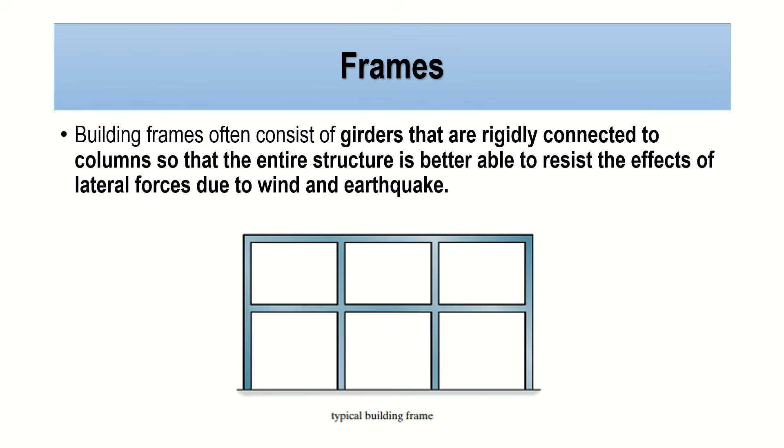Ngayon, bakit nga ba natin kailangan mag-approximate? Sabi dito, exact analysis of indeterminate structure involves computation of deflection and solution of simultaneous equations, so it can be quite time-consuming. Moreover, such an analysis depends on the relative sizes, cross-sectional areas, and or moment of inertia of the members of the structure. Ibig sabihin, kailangan nating i-compute yung deflection or displacement ng structure, as well as solving simultaneous equations. Bakit nga ba natin kailangan mag-solve ng simultaneous equation?

Kasi po, class, if we are solving a framing system, the structure is probably an indeterminate structure. Kapag indeterminate yan, kailangan mo ng maraming unknowns or kailangan mo ng maraming equations para sa maraming unknowns. Kaya para ma-solve yan, kailangan mo mag-solve ng simultaneous equation, and that can be time-consuming. Plus, of course, initially, if you're designing a structure, wala ka pang idea kung ano yung cross-sectional area na papasa, as well as the moment of inertia. Kaya every change mo ng cross-sectional area, every change mo ng moment of inertia, nagbabago din yung ating deflection, nagbabago din yung ating self-weight. Therefore, it can be time-consuming, especially if you're iterating sizes pa.

Ngayon, ginagawa natin tong approximate for that reason. Because of this difficulty associated with the exact analysis, the preliminary design of indeterminate structures is often based on results of approximate analysis, in which the internal forces are estimated by making certain assumptions about the deformation or the distribution of forces between the members of the structure, thereby avoiding the necessity of computing deflection. Ibig sabihin, in order to do approximate analysis, we will be making certain assumptions based on deformation as well as stress distribution or force distribution among each of the members of the structure. Yun daw yung gagawin natin—yung typical behavior ng structure, gagamitin natin yon para makapag-approximate.

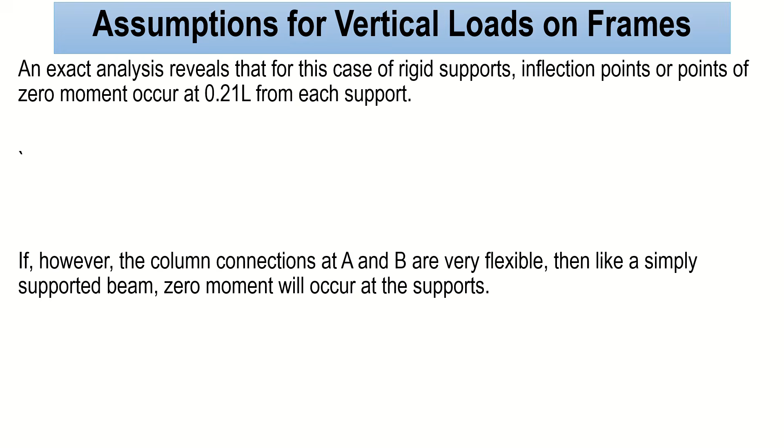Okay, so let's start siguro sa vertical loads and frames. Again, like I said, we need to make certain assumptions. Sabi dito, an exact analysis reveals that for this case of rigid support, inflection points or points of zero moment occur at 0.21 length from each support. Ibig sabihin, if we have a girder supported by rigid members or rigidly connected to members—for example, merong girder tapos connected rigidly sa column—ibig sabihin kaya niyang mag-resist ng moment, or fixed support. Kapag ganyan daw yung scenario, yung point of zero moment or point of inflection, kung saan nagpapalit ng sign yung moment diagram natin from negative to positive or positive to negative, mangyayari yan at 0.21 or 21% ng length from the left support and right support.

Okay, ngayon, if however the column connections at A and B are very flexible, ibig sabihin para siyang simply supported, yung zero moment natin will occur at the support.

So alam natin yan, no? Kapag nag-solve tayo ng shear and moment diagram, kapag sa simply supported beam, tapos loaded all throughout siya with a uniform load, ang zero moment natin will always happen at the support or point of inflection.

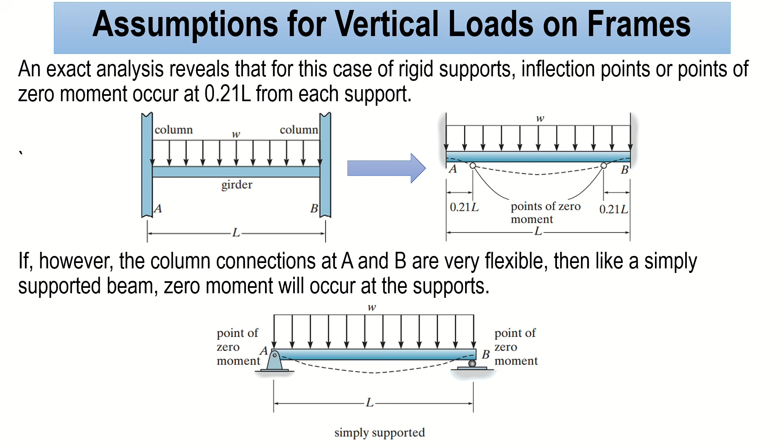So ngayon, we can create relationship between that. Paano tayo makapag-create ng relationship? So the moment diagram of a simply supported beam loaded all throughout is like this. Nakita niyo yung appearance?

Siyempre, ang maximum moment natin is WL squared over 8. Ngayon, class, if we have a rigidly connected girder to the support, the moment diagram, like I said, is around 21% ng length, or yung point of inflection is around 21% of the length from the left support tsaka right support. And this is the appearance of your moment diagram.

So, anong certain assumption ang gagamitin natin dyan? Since these are inflection points, ito, inflection points yan, tapos ito, pin and roller. So, we can say that we can change this one, itong point na to. Tapos sabihin natin, pwede nating lagyan ng pin and roller yan. Kasi point of inflection naman yan tama ba? So, ngayon, pwede ako palang maglagay ng pin tsaka roller dito. Yun yung certain assumption na gagamitin natin para makapag-solve tayo ng indeterminate frame.

So ngayon, kapag nilagyan ko ba ng pin tsaka roller yan, magiging determinate na yan? Of course. Kasi, kapag meron tayong fix, meron tayong 3 unknowns. Di ba meron tayong pin? So, another 2, 5 na. Ngayon, meron kang roller, 6. Ngayon, meron ka ulit fix, 3. So, ilan na yun? 9.

And ang nangyari, naputol sa 3 segments ang ating girder. So, isang segment, pangalawa, pangatlo. Kasi nilagyan mo ng simply supported sa gitna, so anong mangyayari? We got 3n. So, 3n is 3 times 3, which is 9. And we have 9 unknown. So, therefore, this structure or this framing system will become statically determinate.

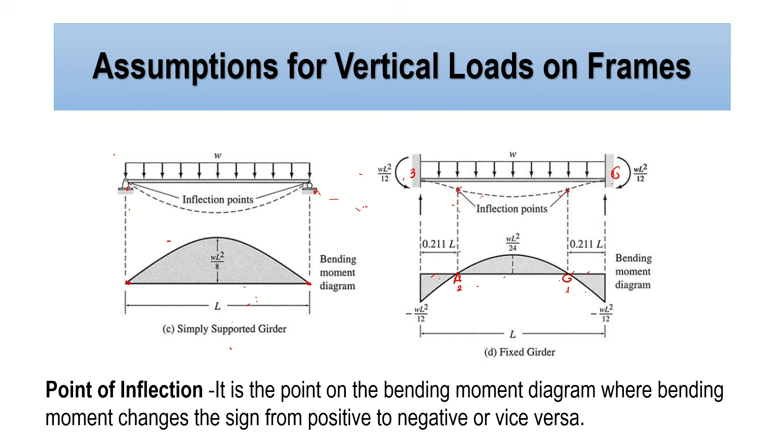Okay? So, ngayon, ayan, it is the point on the bending moment diagram where the bending moment changes the sign from positive to negative or vice versa. And then sabi dito, in reality, however, the column will provide some form of flexibility at the support, and therefore, we will assume that zero moments occur at the average point between the two extremes.

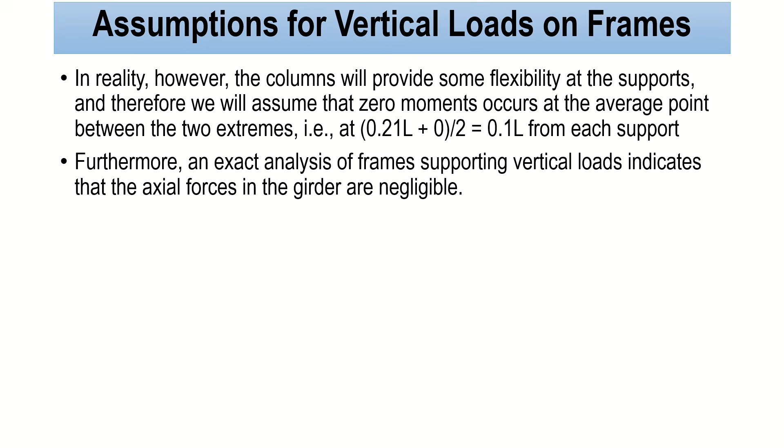So, therefore, yung 0.21, di-divide natin ng 2 from each support. Furthermore, an exact analysis of frames supporting vertical loads indicate that axial forces in the girder are negligible. Ibig sabihin, instead of using 21% ng length from the left support and right support, ang gagamitin natin is 10% ng left tsaka right. Doon tayo maglalagay ng pin tsaka roller.

Bakit ganon? Kasi nga, hindi naman totally fixed yung ating column. It will provide some form of flexibility. So, kaya, dinidivide natin sa 2. So, meron tayo ditong 10% length, 10% length, pin, roller. Of course, binawasan mo ng 20% yung length, yung natira sa gitna is 80%.

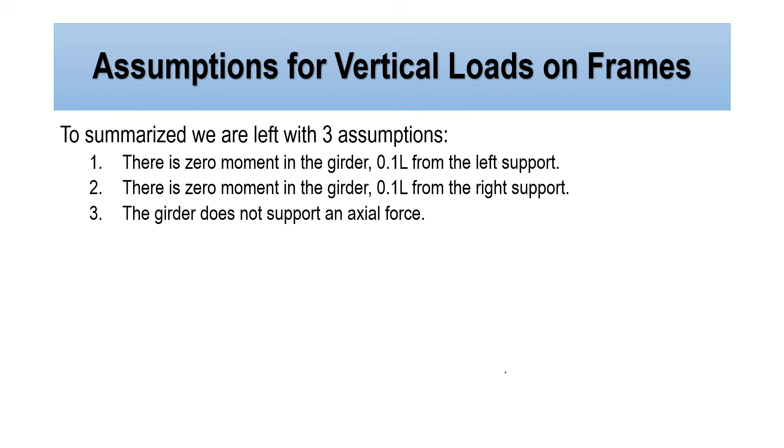Okay? So, ngayon, in summarize, ito yung ating 3 assumptions. Sabi natin, there is zero moment in the girder, 10% of the length from the left support, and also there is zero moment in the girder, 10% of the length from the right support. And then number 3, the girder does not support any axial forces. Okay? So, ngayon, ito yung summarize.

For example, we have a framing system, tapos we will solve it approximately due to vertical loads. So, ngayon, again, 10%, lagay kang pin and roller. Kapag tuloy-tuloy, ganun lang din gawin mo sa kabilang girder. Again, determinate pa rin yan kasi pinapalitan mo pa rin ng simply supported yung gitna. Okay? You don't need to worry. So, ganun lang din, ayan, no? Pinalitan lang natin ng pin tsaka roller.

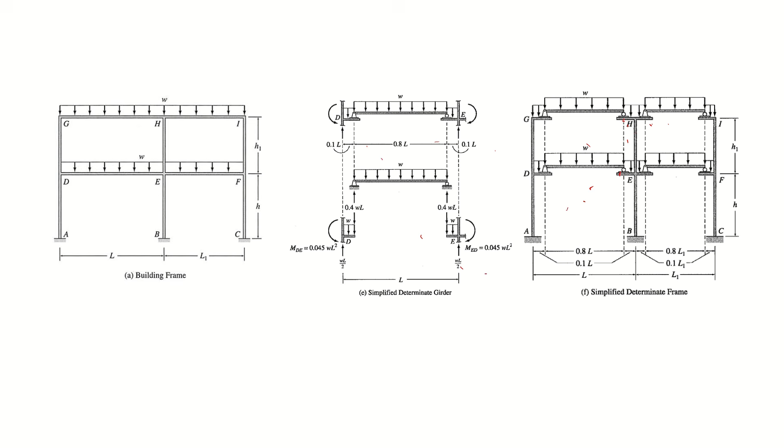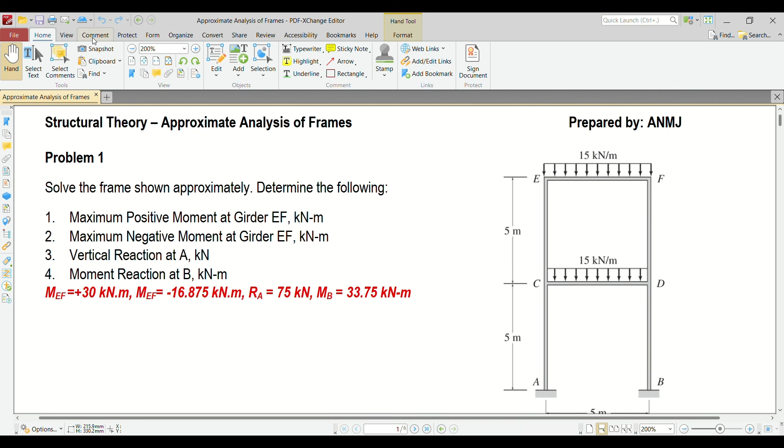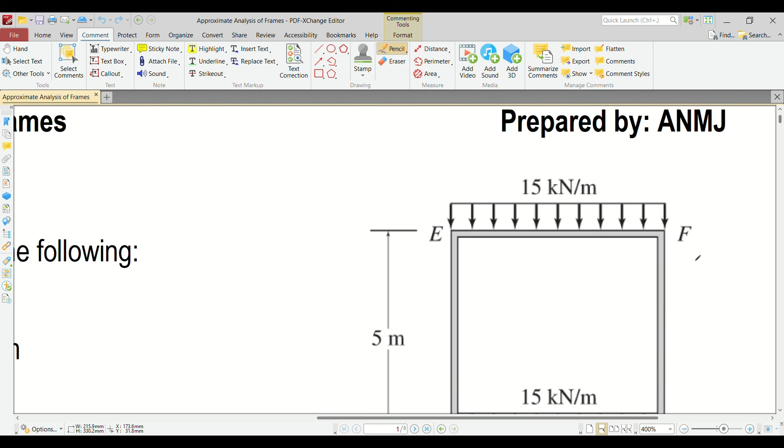Let's start with the maximum positive moment at girder EF. As you can see, the moment diagram of a rigidly connected member looks like this - did you see this earlier? Now, where does the maximum positive moment happen? At the center, right?

So what we'll do is measure 10% of the length from the left and from the right, then solve for the moment at the center. Let's try that - this is for number 1. You can skip this part if you're in a hurry.

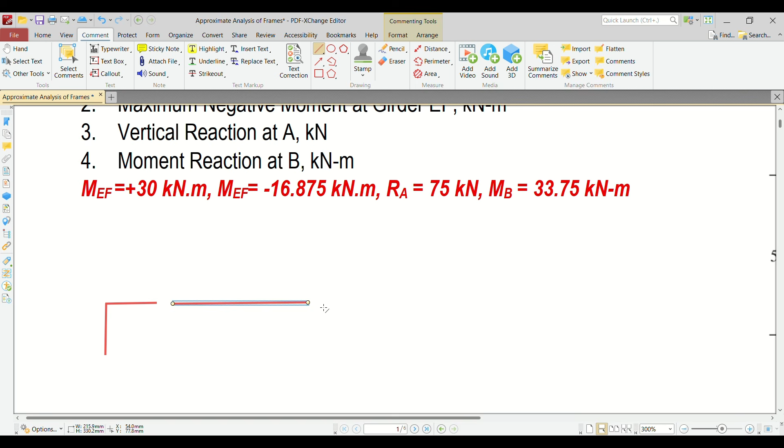So here is our framing system. This is E, let's fix this, and this one is F. And don't forget the loading - of course we have loading.

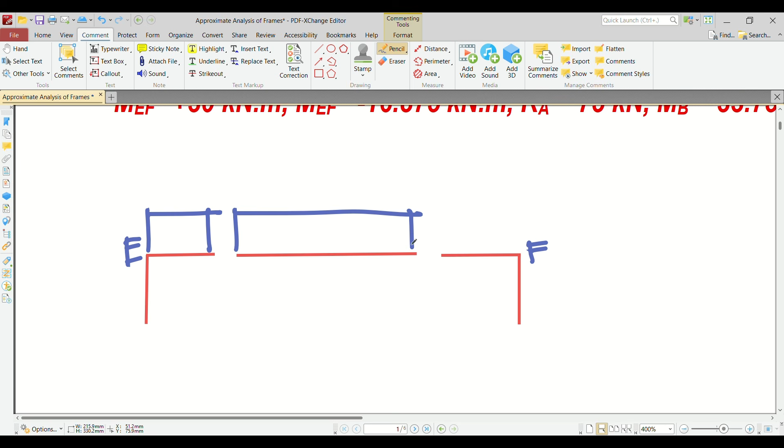The length of this one is 10%, so if that's 10%, this is 80%, then this is also 10% of the length. So what is the length? The length is 5 meters. What is 10% of 5 meters? 5 times 0.1, that is 0.5. So this is 0.5.

This is also 0.5. So 5 minus two 0.5's, that is 1, so the middle portion is probably 4 meters. Let's add the loading: this is 15 kilonewton per meter, this is also 15 kilonewton per meter, and this one is also 15 kilonewton per meter.

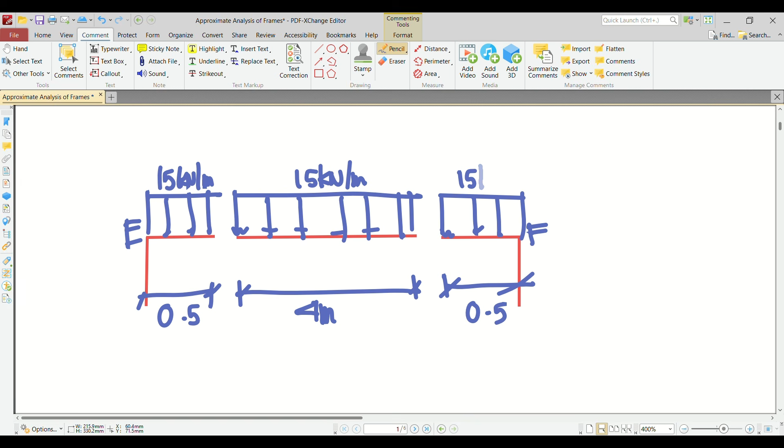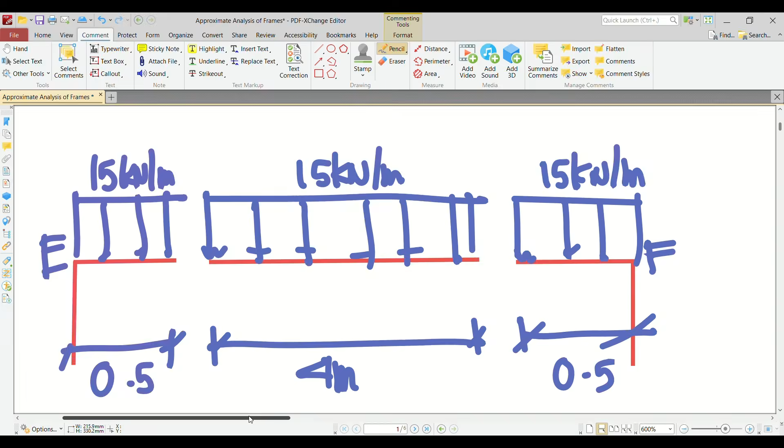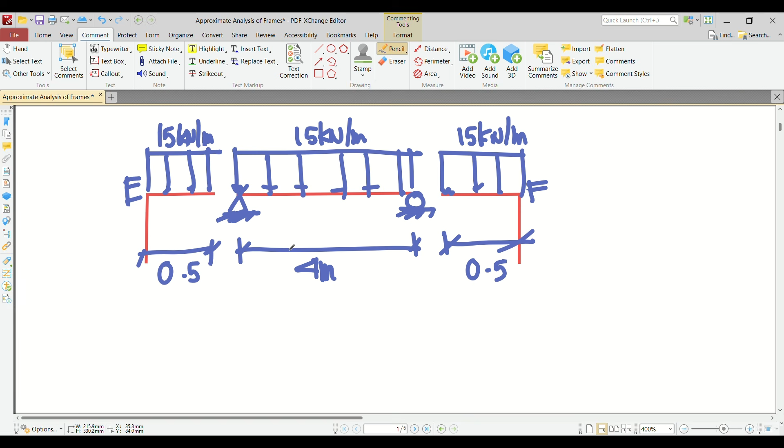We're asked to find the value for the maximum positive moment. Again, the maximum positive moment happens at the midspan of the framing system, here in the middle. This means we need to replace it with a simply supported beam - so this becomes a pin, this becomes a roller.

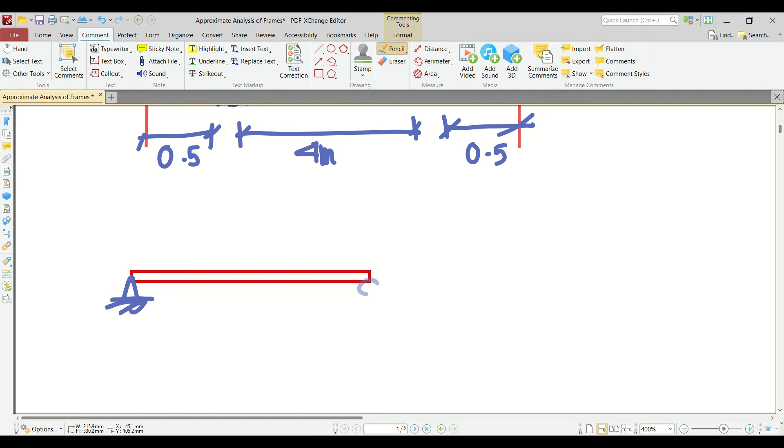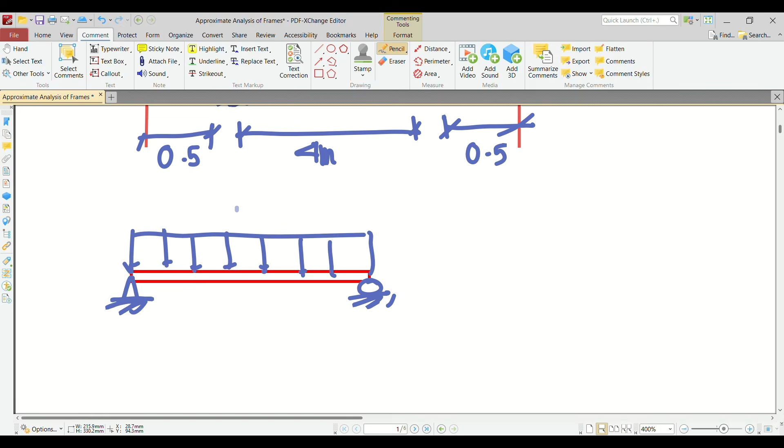So we have a simply supported beam with a length of 4 meters and a uniform load of 15 kilonewton per meter. Let me redraw this for clarity - so here it is. We have a pin, a roller, 15 kilonewton per meter, and this is 4 meters. This is just coming from the previous setup, I just rearranged it.

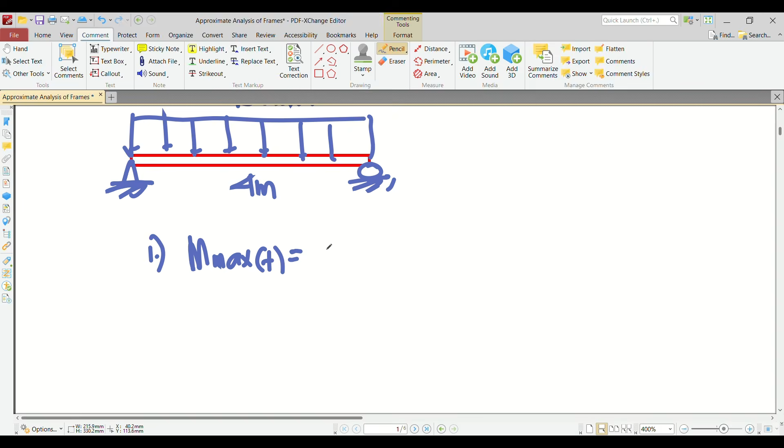When we have simply supported beams loaded all throughout, you saw the formula earlier. So for number 1, the formula for maximum positive moment is equal to WL squared over 8. Our W is 15, and our L is 4 squared over 8.

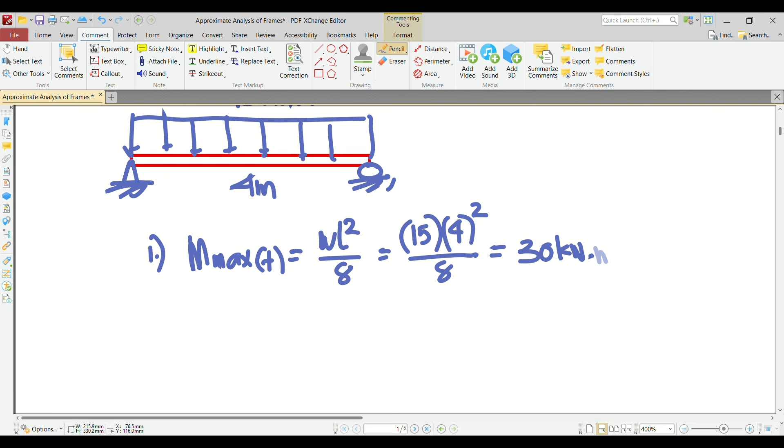So what's the answer here? 15, 4 squared over 8, that is 30 kilonewton meter. That is your answer for problem number 1. That's correct - 30 kilonewton meter.

Next, we need to find the maximum negative moment at girder EF. Like I said, the moment diagram looks like this. Now where does the negative moment occur? Probably at the left segment or the right segment.

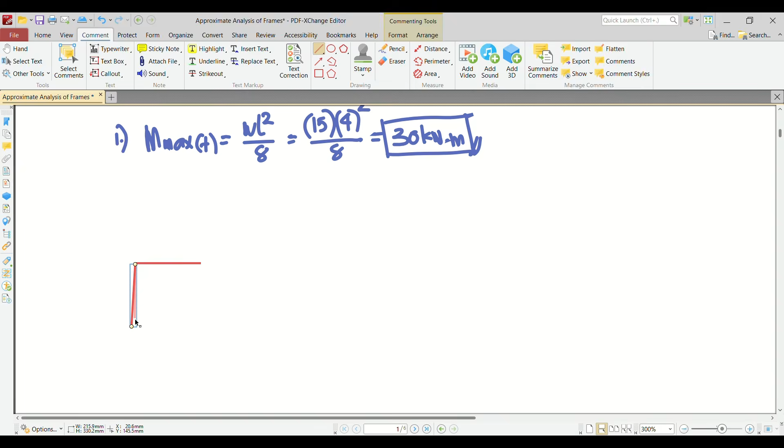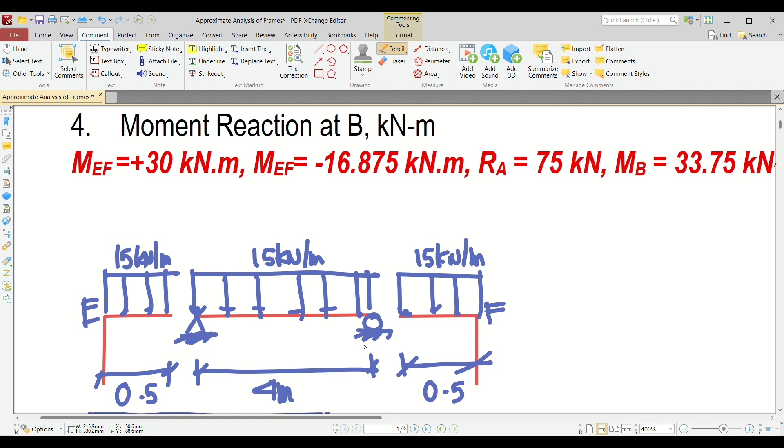I'm just isolating this part. So this one is 15 kilonewton per meter, this is point E, and we're looking for the negative moment. Don't forget, this is an internal pin and internal roller. Now there's a reaction there, right?

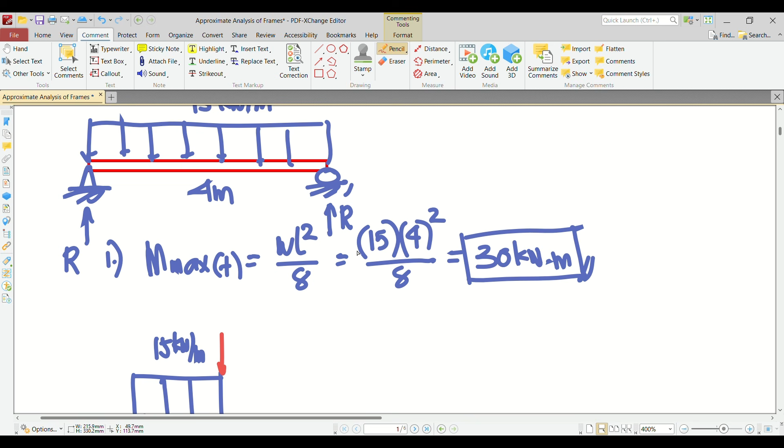We all know the formula for getting the reaction for a simply supported beam is just WL over 2. So now let's get R, which is equal to WL over 2.

So that is 15 times 4 divided by 2. 15 times 4 is 60. Tama ba? 60 divided by 2, so that is 30.

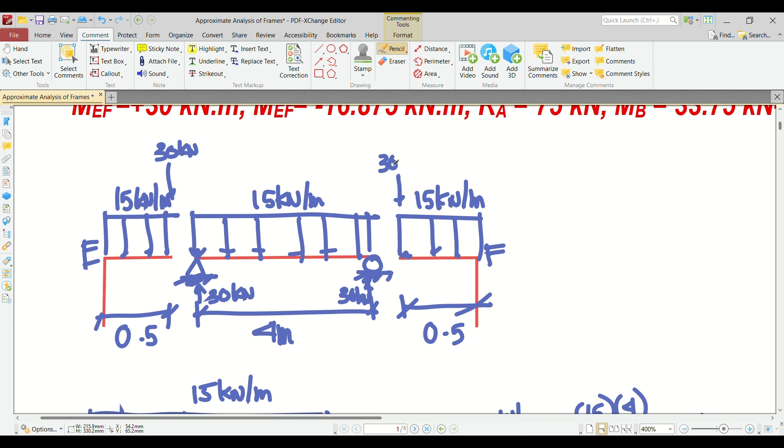30 kilonewton. Ibig sabihin, may 30 kilonewtons ka pala dito. Itatransfer mo rin yan sa kabila. So meron ka ditong 30 kilonewton, and then we have here also 30 kilonewton. Ganyan talaga kapag may internal pin tsaka internal roller.

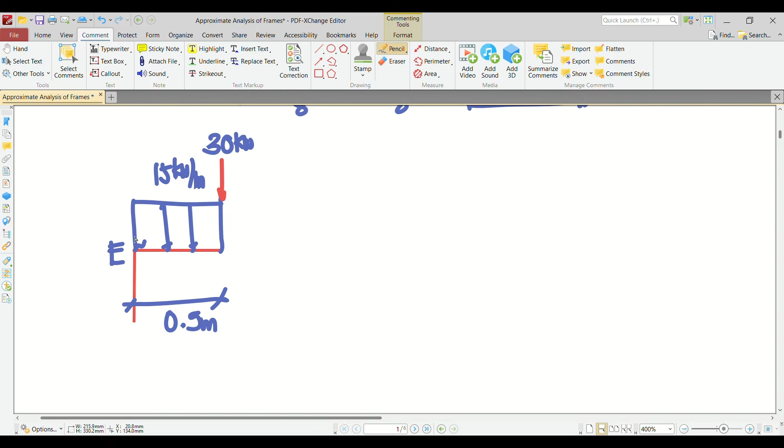Ito ay 30 kilonewton. Remember that this distance is around 0.5 meters. So madali lang yan, para makuha yung moment dyan, di mag-moment ka lang dito. Summation moment, tawagin natin tong ME.

By the way, this is number 2. Clockwise positive. So therefore, negative ME plus 15 times 0.5 times 0.5 divided by 2, and then plus 30 times 0.5, equal to 0.

So ngayon, don't worry. Ang lalabas dyan, of course, is positive. But our moment is counterclockwise, which is negative talaga. Negative x plus 15, positive yan lumabas sagot natin. Pero of course, alam naman natin na negative talaga yung sagot based on the moment diagram. Tinama ko lang yung sign convention.

So the answer here is 16.875 kilonewton meter. Wag malilito, positive yung lalabas dyan, pero counterclockwise nga ito, so dapat negative pa rin. Tinama ko lang yung ating assumption. Let's see if we're correct. Tama naman, negative.

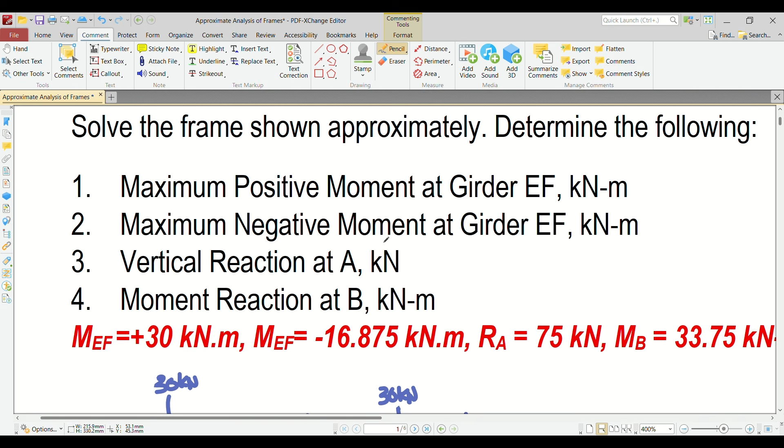16.875. So ngayon, yung number 3, determine the vertical reaction at point A. So ito yung point A natin. Paano natin ma-determine yung vertical reaction? Hatiin mo dito and then get the vertical reaction.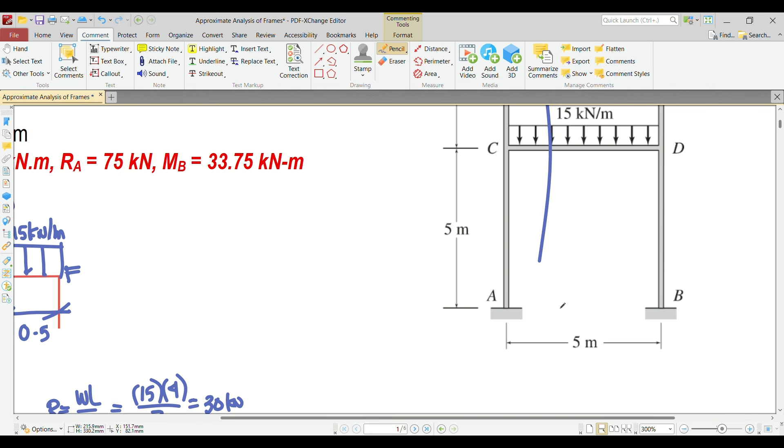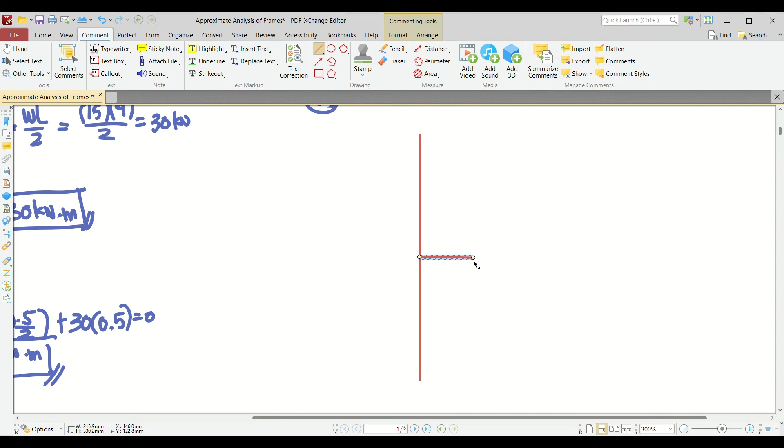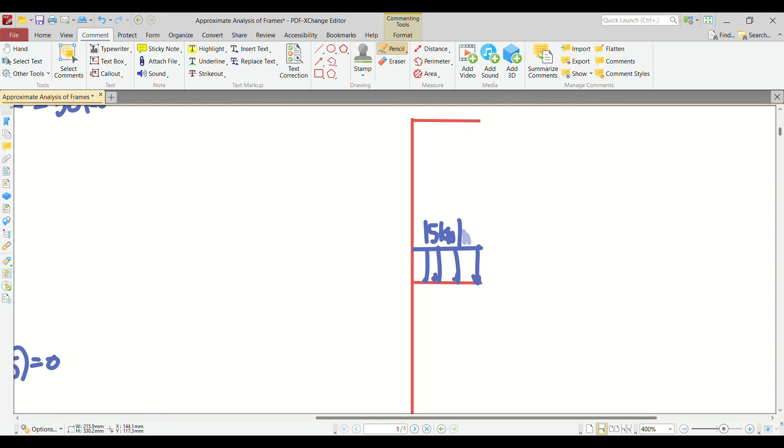Okay, paano yun? So this is number 2, and number 3, sorry. Sa number 3, kapag hinati ko yan, may ganito. Tapos lagyan natin ng loading. This is 15 kilonewton per meter. This is also 15 kilonewton per meter.

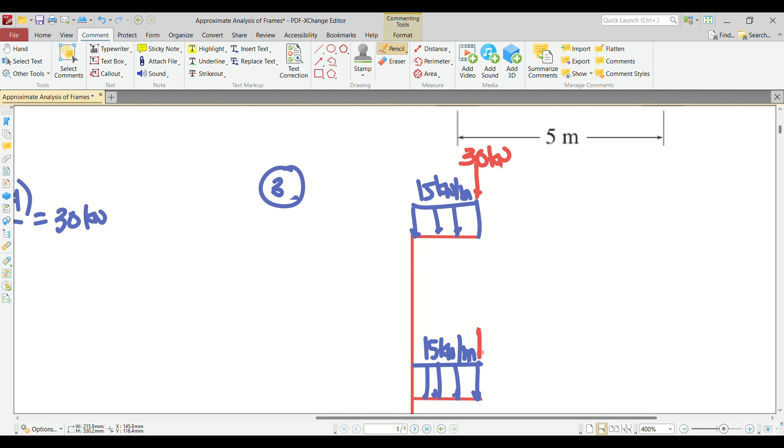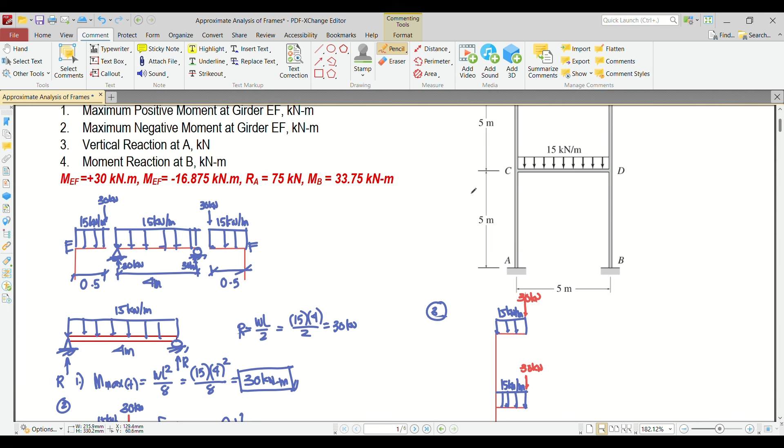Ay sorry, hindi ko pa nalagyan ng uniform load. And then, of course, we do have 30 kilonewton. Syempre parehas lang yan sa baba, 30 kilonewton, parehas lang naman kasi ng distance. Ito rin, magiging ganito rin yan, and then ita-transfer mo din yung concentrated reaction sa left side tsaka sa right side. So this is point E, tsaka C, tsaka A.

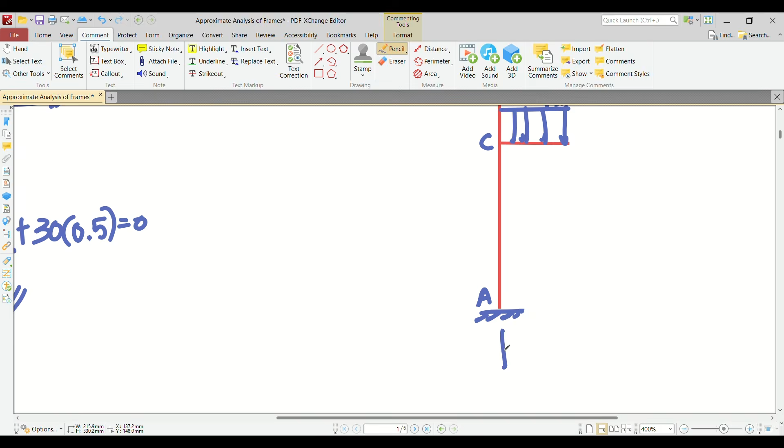So this is point E, C, and then A. Ang hinahanap is vertical reaction sa A or AY. So ngayon, paano mo susolvein yung AY? E di summation forces vertical lang, no? Summation forces vertical equals 0, upward positive.

So therefore, what will happen? So we have, remember, this distance is 0.5. Ano mangyayari? So we have AY, positive kasi upward, so minus 15 times 0.5. Ngayon, multiply mo yan sa dalawa kasi dalawa up and down, so times 2, minus 30 kasi downward times 2 ulit kasi dalawa, equals 0.

So yung AY natin should be equivalent to 15, 0.5 times 2, plus 30 times 2. So 75 kilonewton. Yung reaction mo sa point A is 75 kilonewton. Let's see if we're correct. O, tama naman, RA is 75 kilonewton.

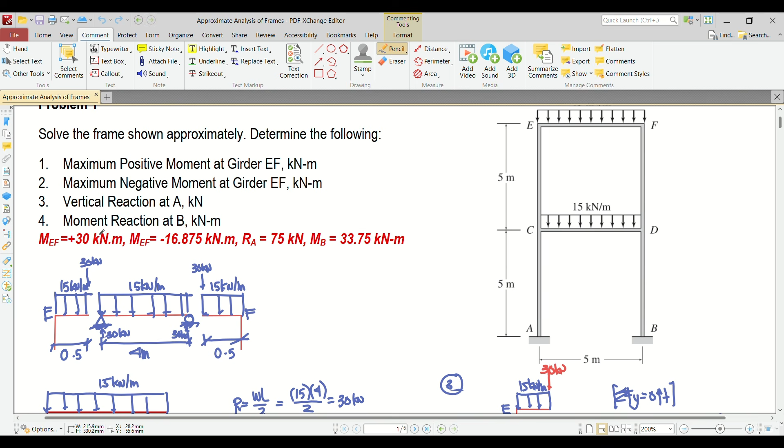So ngayon, pinapahanap ka rin ng moment reaction sa B. So ngayon, i-drawing naman natin yung left side. Ay, yung right side, sorry. Ito yung number 4.

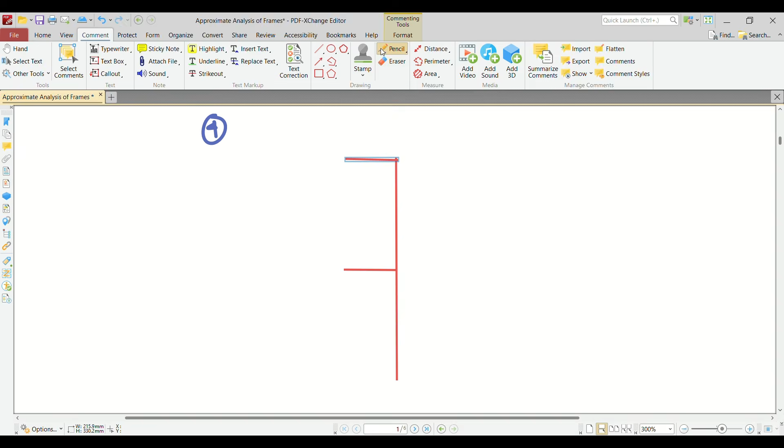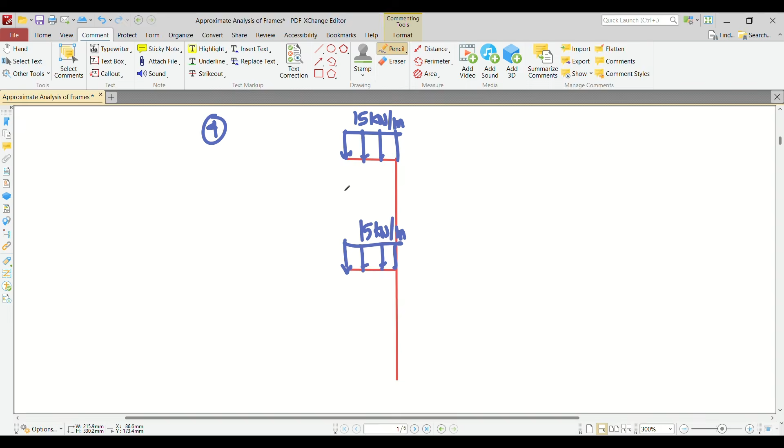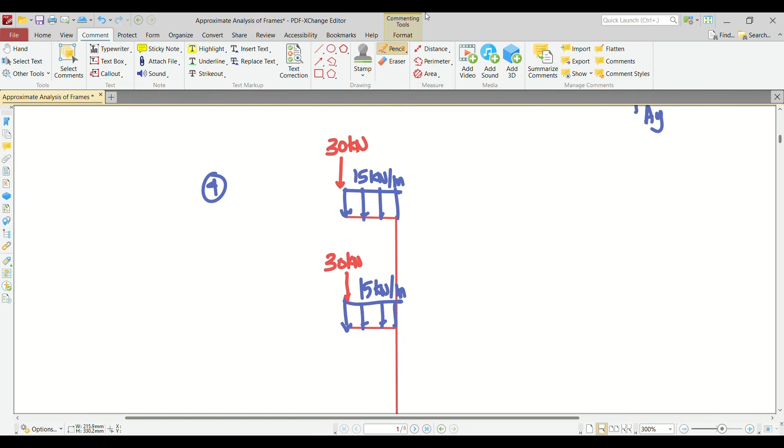Okay, lagyan natin ng loading. 15. So ngayon, lagyan natin ng concentrated loading. Again, meron din doon 30 ha, kasi may roller din dyan. 30 kilonewton. 30 kilonewton.

Okay, and then of course, lagyan natin ng support. And then, ang pinapahanap is MB. So assuming natin this is MB. May vertical din dyan, pero hindi na natin sasolve kasi pinapahanap lang naman si MB. Again, this distance is 0.5 also.

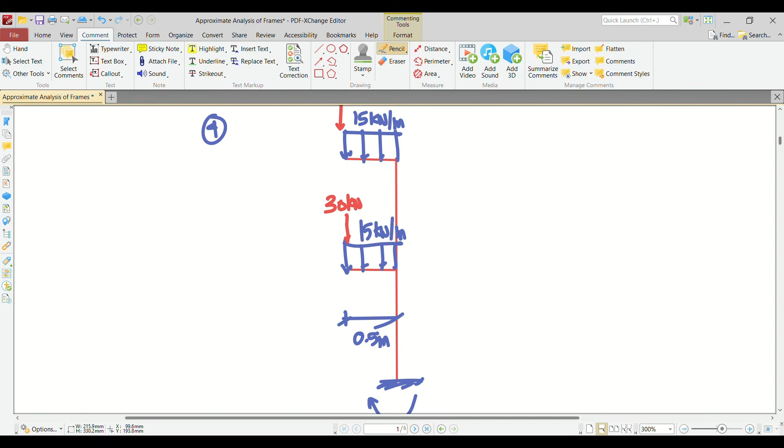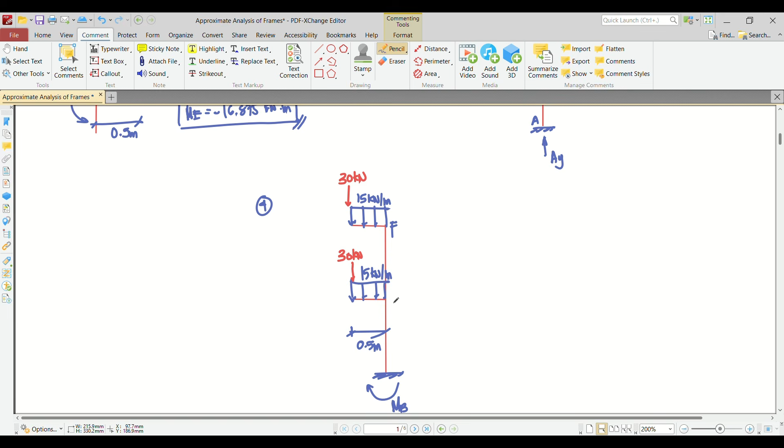Ngayon, paano natin ito sasolve? E di mag-moment ka sa point B. Ito ay F. Ano yan? D ba ito? D. B. Okay, so let's try.

Summation moment sa B equals 0, clockwise positive. So what will happen? So we have positive MB. And then, minus 15 times 0.5 times 0.5 over 2 times 2 kasi dalawa.

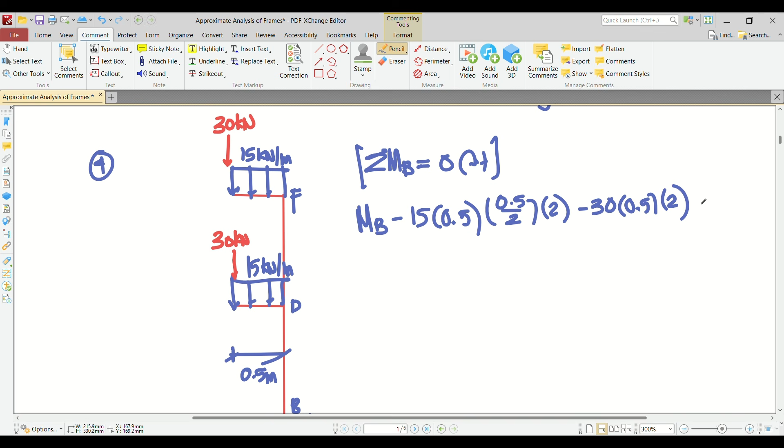And then, minus 30 times 0.5 times 2. Perpendicular distance ang sinusukat natin, no? So perpendicular distance nito is of course 0.5. And then, equal mo yan sa 0. So MB is equivalent to 33.75.

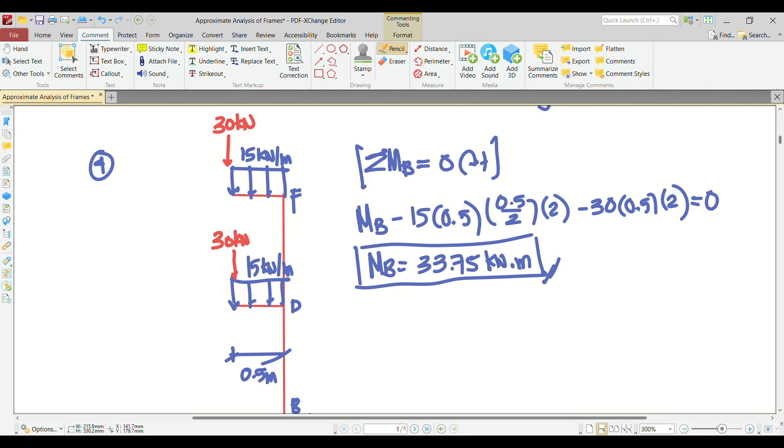Kilonewton meter. Okay? So that's how we solve problem number 4. Let's see if we're correct. Correct naman. Okay? That's how we solve problem number 4.

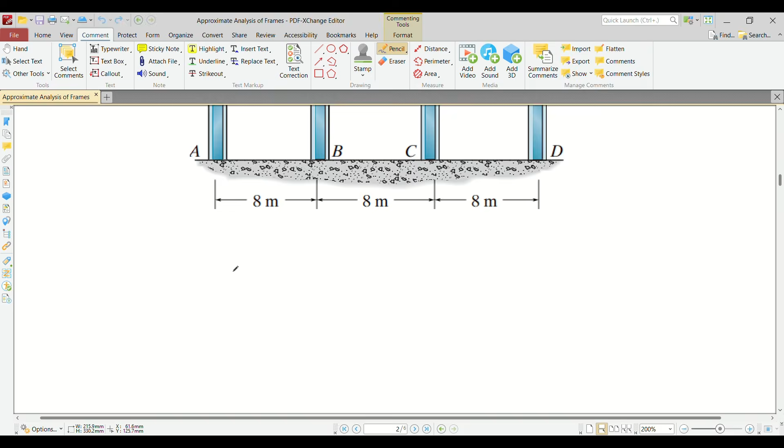Ngayon, let's try to solve first the point A. Sa point A, anong gagawin natin dyan? Again, hatiin natin. So, 10% lagyan mo ng pin, 10% lagyan mo ng roller. Pero, para mas malinaw, i-isolate ko na lang. So, bali mangyayari ganito.

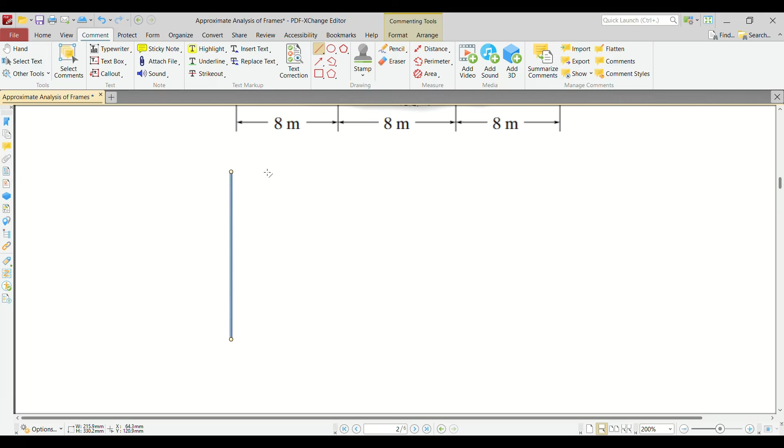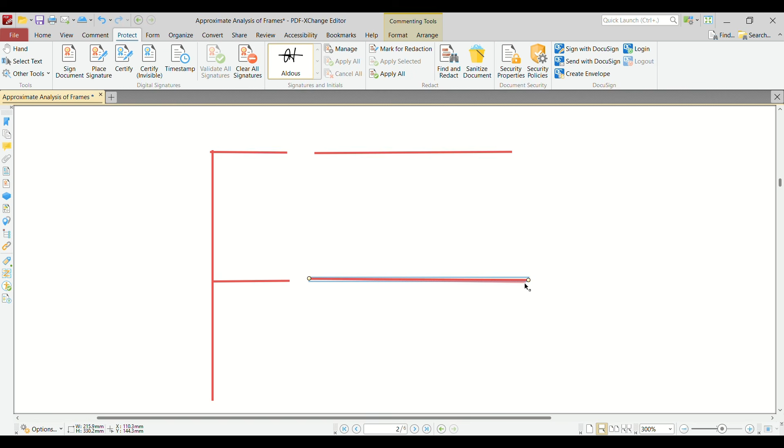Okay? So, again, dahil meron tayong pin tsaka roller dito, so yung reaction niyan is madadamay natin. I-drawing ko na lang din yung kalahati para mas maayos. So, we have here, pag ganito, pagpasensyahan nyo na yung drawing ko.

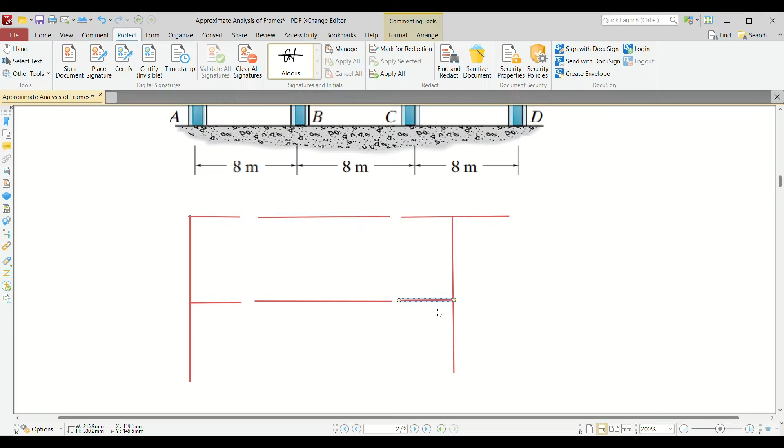And then, let's write the pin. Tsaka column. Ay, pin tsaka column. Pin tsaka roller. So, you have your pin and a roller. Tapos dito ulit, pin. Dito ulit, roller. Okay? And let's write the loadings.

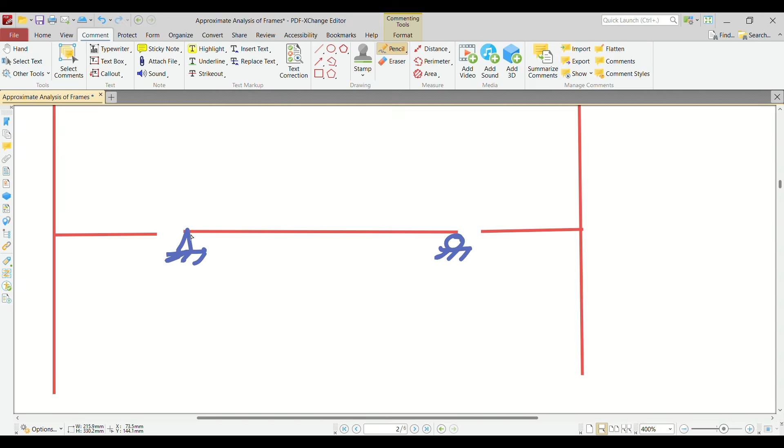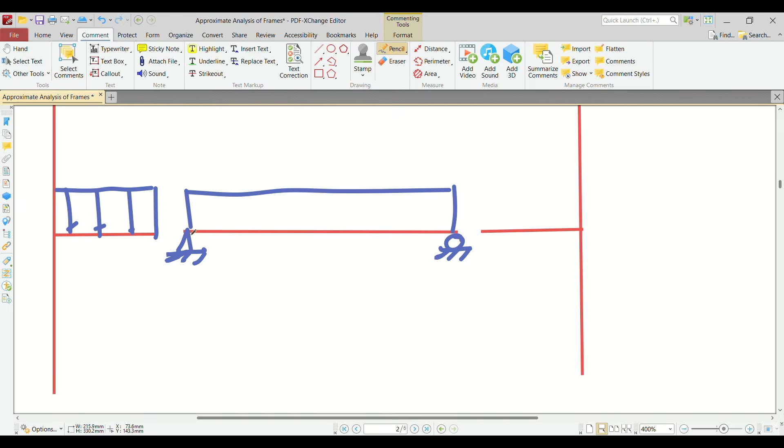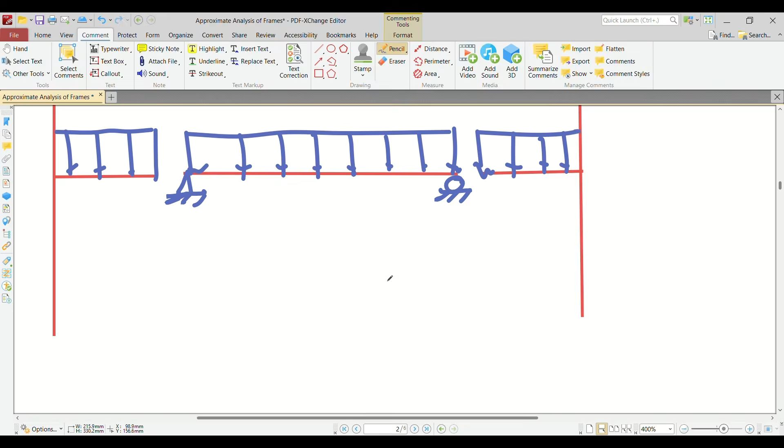Okay, the other one, the bottom. Okay? So ngayon, lagyan natin ng magnitude. Yung magnitude natin is 3 kN sa left side, tapos 5 kN sa baba. So 3 kN per meter. Ito din. Five kilonewton per meter. 5 kilonewton per meter. And let's write the distances.

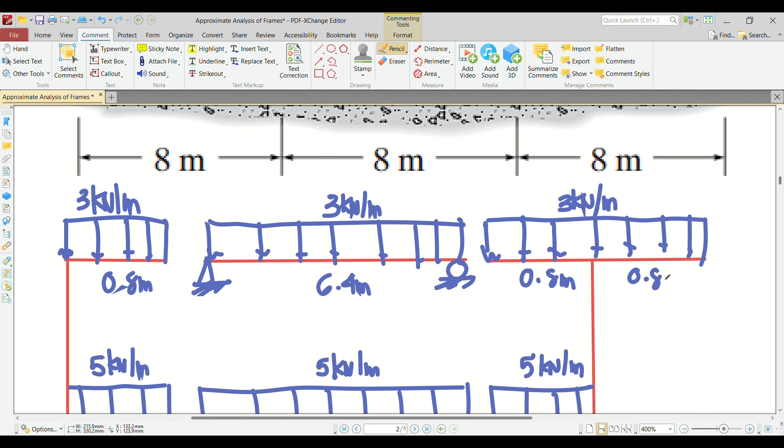So ngayon, 10% ng 8 is 0.8. Tama ba? 8 times 0.1. Tama, 0.8. So ito ay 0.8 meters. So ngayon, 0.8 times mo sa 2, minus mo sa 8. 8 minus 2 times 0.8, so that is 6.4. Yung nasa gitna natin, ang distance nito, 6.4 meters. Ito, 0.8 meters. Of course, dito rin ay 0.8. Parehas lang naman sila. Ayan, 888. Okay? So, after that, siyempre, ganun din yung distance dito. 0.8 meters, 6.4 meters, and then 0.8 meters.

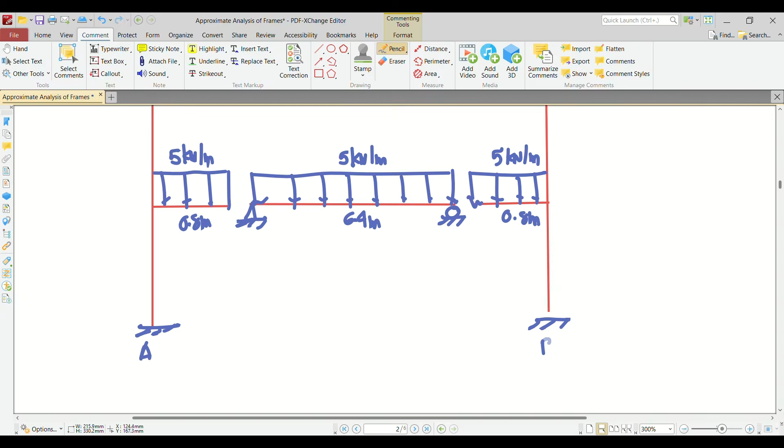So, ngayon, meron kang fix dito. Meron ka ding fix dito. This is your point A and point B. So, yung ibang point, wala na tayong pakialam doon. Ano mangyayari? So, of course, kailangan natin muna kuhanin yung reaction nito.

Okay? So, tawagin natin sigurong R1. Paano natin kukuhanin si R1? Dito na lang. So, R1 is equivalent to WL over 2. Ano yung W natin? 3. L natin is 6.4. Divided mo sa, so, ilan kaya ito? 3, 6.4 divide 2. So, that is 9.6. So, this is 9.6 kilonewton.

So, meron ka pala ditong 9.6 kilonewton. You also have here 9.6 kilonewton. Okay? So, after that, syempre, ilo-load natin yan dito. So, this is 9.6 kilonewton and also this one. So, ngayon, sa baba din.

So, tawagin natin itong R2. R2 is equivalent to 5 times 6.4 divided by 2. Palitan mo lang ng 5 yung kinalculate mo kanina. So, that is 16. So, this is 16 kilonewton. Ita-transfer mo yan sa kabila. So, meron ka ditong 16 kilonewton. And also this one, 16 kilonewton.

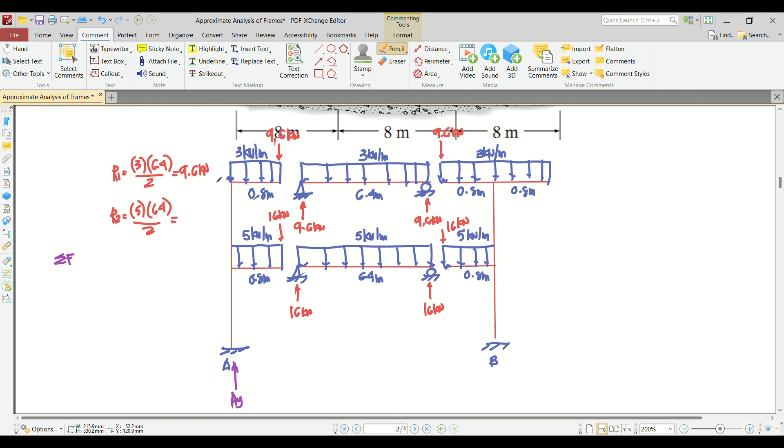So, we have 9.6. I-zoom in ko, sana magkasya. Summation, forces vertical equals 0. Considering left side, yung point A, upward positive. So, ano mangyayari? So, we have 9.6 plus 16. Pero AY muna unahin natin. So, AY upward plus 16, yung nasa taas plus 9.6. Sorry, minus pala yung dalawa, kasi that is downward. So, minus, minus. And then, minus, ito, 3 times 0.8.

And then minus 5 times 0.8, and then equal mo yan sa 0. So ano kaya ang value ng AY natin? So 16 plus 9.6 plus 3.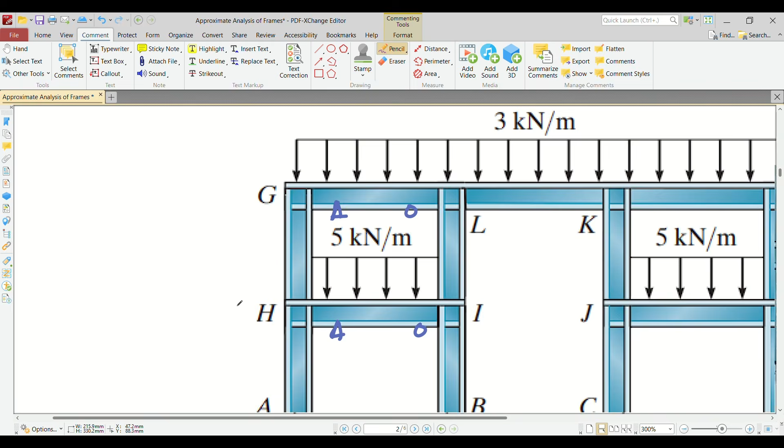So ang lumalabas na sagot sa akin ay 32. Let's see if we're correct. So 32, tama naman. So 32 kilonewton. So this is your first answer.

How about the moment? As you can see, yung moment natin pa-clockwise, so dapat ang reaction natin is pa-counterclockwise. Ito, yung moment ng loading natin is pa-clockwise. Yung reaction is dapat pa-counterclockwise to resist that movement, no? So ito, tawagin natin MA.

So to determine that, mag-moment ka sa point A. Summation moment sa point A equal to 0, clockwise positive. So what will happen? So we have negative MA kasi counterclockwise, plus 16, yung loading sa taas, ito, 16 times 0.8

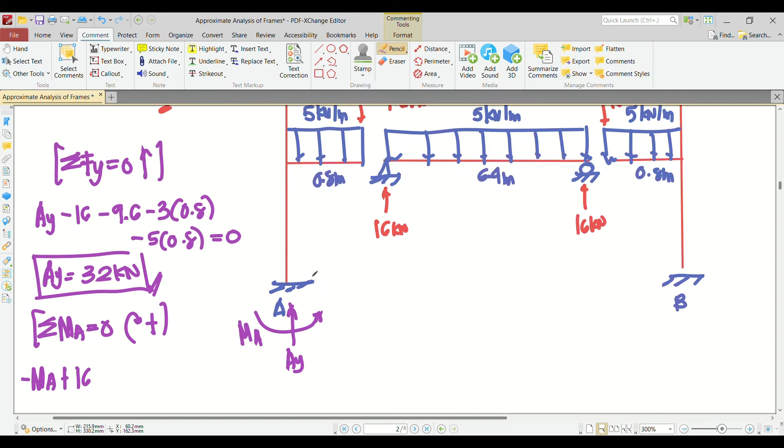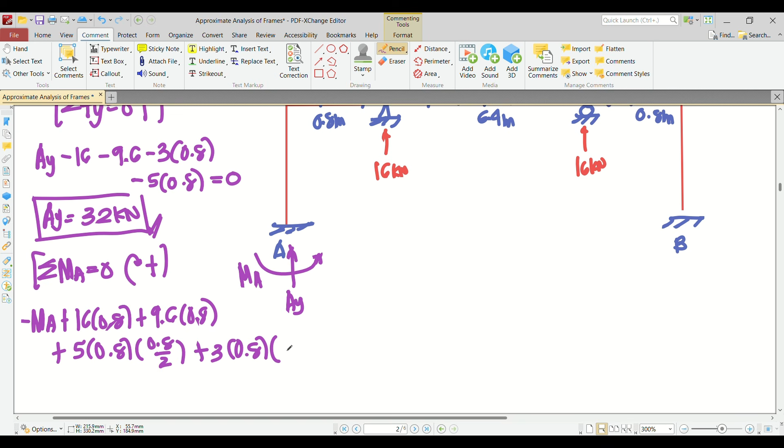plus 9.6 times 0.8 also. And then plus, ano ba? 5 times 0.8. Centroid is 0.8 divide 2. And then plus 3 times 0.8, 0.8 divide 2. And then equal mo yan sa 0.

Saan ang galing yung 3? Galing dito. Okay? So ano kaya yung value ng MA natin? 16 times 0.8 plus 9.6. Kung tama pagkakalkyo ko, ang lumalabas is 23.04

kilonewton meter. Okay, let's see if that is correct. 23.04. So tama naman. Okay?

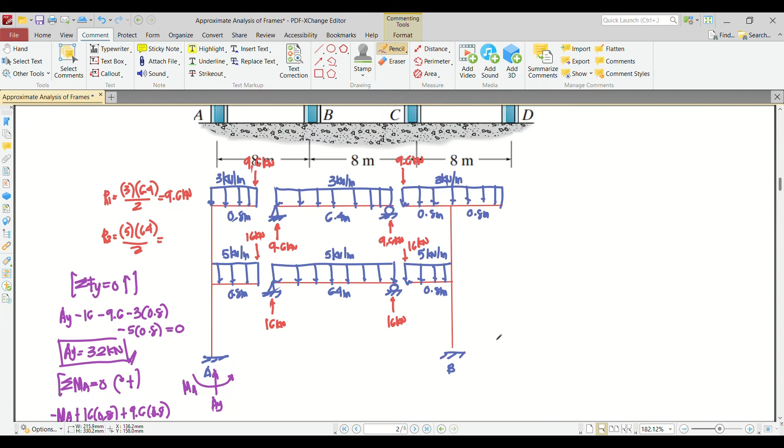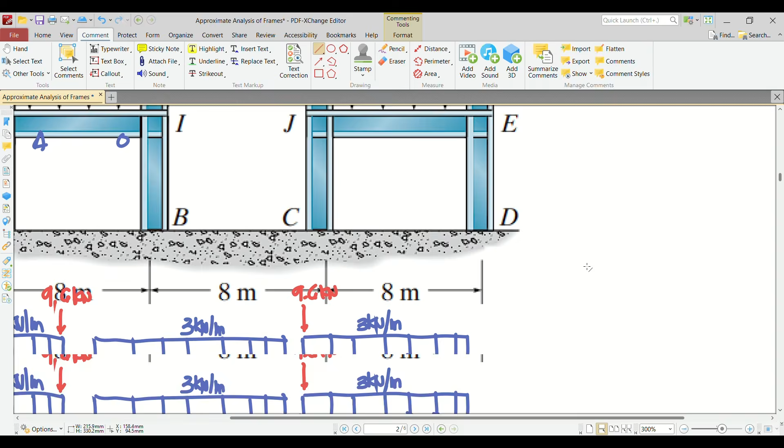So ngayon next is the reaction at point B and the moment at point B. So ngayon ito yan, so kulang pa to. Siyempre meron din tayong pin tsaka roller dito, di ba? Pin and roller. Siguro kailangan ko rin i-drawing yun para mas may imagine yun. Nandito pa yun eh.

Okay? So meron tayong pin and a roller. So ganun din, meron tayong loading, 3 kilonewton per meter. And then of course kailangan din natin kuhaan yung reaction yan. Pero nasolve na natin yung reaction yan eh. 9.6 lang din yan. Ito rin ay 9.6.

Paano ko nasabi? Kasi same lang sila ng distance, 8 meters, no? So probably yung nasa gitna is 6.4 meters lang din. 9.6 kilonewton and then sa kabila may 9.6. Pero sulat ko na rin yung distance dito, no? So this is 6.4 meters.

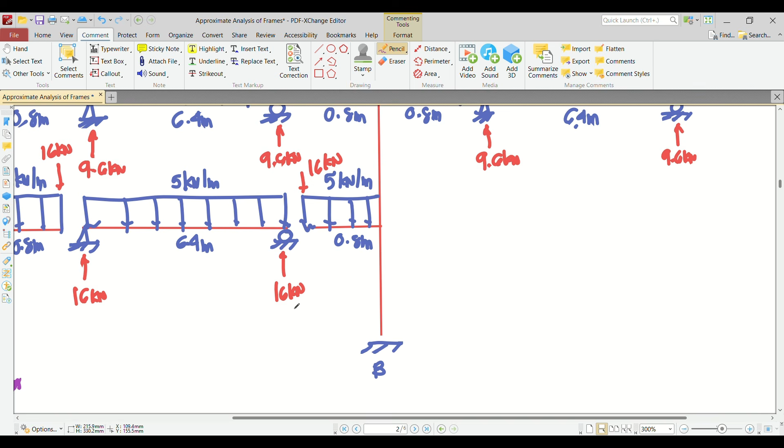Okay? So now, how do we solve for the vertical reaction? E di pag-addit mo lang lahat ng nakikita mo. So paano yan? So ngayon summation. So of course we do have here, no? By. Okay? Summation forces sa y equals 0, upward positive.

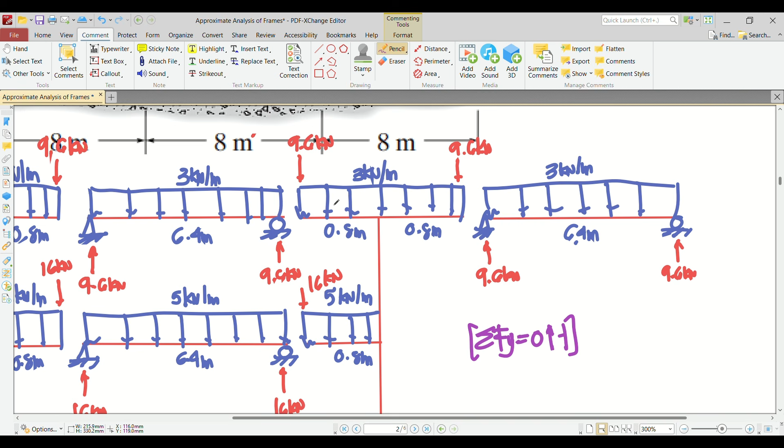Considering right side of the cutting plane. So we have here 9.6, dalawa. Okay? And then syempre, unahin muna natin si By. So By upward, so positive, minus 9.6 dalawa times 2 mo.

And then we also have 16. So minus 16 kasi downward. Minus the uniform loading, that's 3, times dalawang 0.8, that's 1.6, no? So 3, 1.6 meters. And then we also have negative 5 times 0.8. And then equal natin sa 0.

So yung By natin is equivalent to... 5, 0.8 equals 0. 44, am I correct? So 44. So our By is equivalent to 44 kilonewton. So this is our answer.

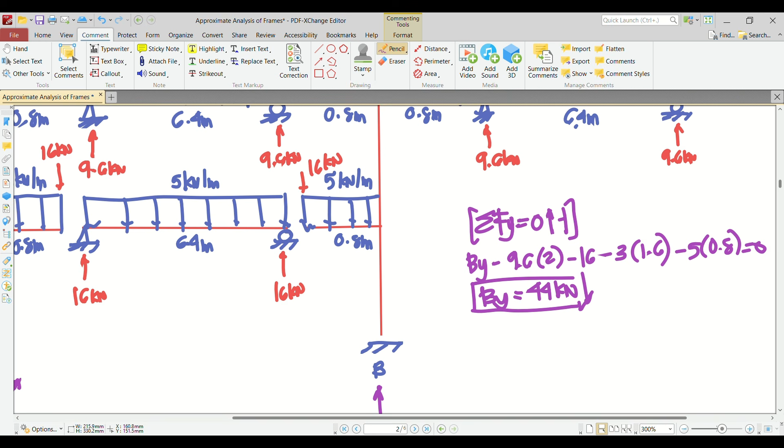Okay? So how about the moment? So ganun lang din. So syempre, parang mas lamang yung papunta sa counterclockwise compare sa clockwise. So probably yung reaction natin dito is clockwise. So ilagay ko na lang clockwise, MB. And to solve that, summation moment sa B equals 0, clockwise positive.

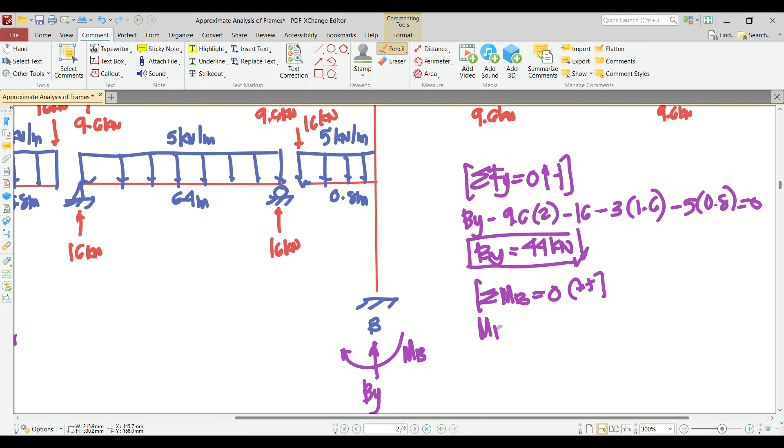So what will happen? So we have negative, clockwise yan, so positive MB. Okay? And then minus, unahin na natin to, 16 times 0.8. And then we also have the concentrated loading here, so 9.6 minus 9.6 times 0.8. Tapos meron tayong concentrated loading dito.

So plus 9.6 times 0.8. And then, ano ba? Wala na, uniform loading na lang. So yung uniform loading natin is minus ulit ng 5 times 0.8, centroid is 0.8 divided by 2. And then sa taas we have 3 times 0.8 times 0.8 divided by 2. And then plus 3 times 0.8, 0.8 divided by 2 equals 0.

So saan nanggaling tong plus? Dito po yan, kasi clockwise na yung movement niya from point B. So itong positive na to, dito nanggaling sa right side. Itong negative na to, sa left side nanggaling. Okay? So ngayon itong dalawa, magka-cancel out. Itong dalawa, magka-cancel out din.

So ngayon siguro baguhin natin yung panulat. This one and this one will become 0. Ito rin, tsaka ito. So ano natira? Ito na lang. So MB is equivalent to 16, 0.8 plus 5. So nakuha ko is 14.4 kilonewton.

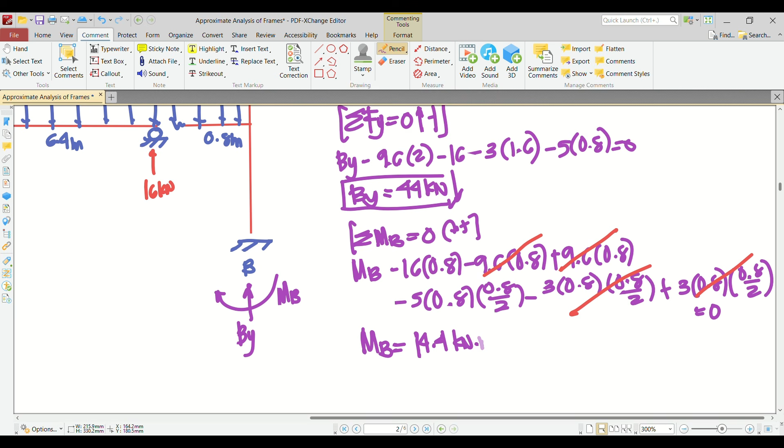So this is our answer for problem number 2. Let's see if we're correct. 14.4, correct naman. So that's how we answer problem number 2.

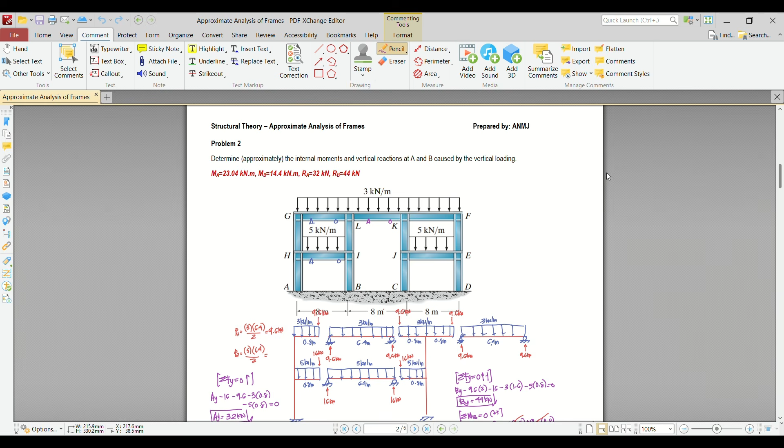Next topic, we will discuss the approximate analysis due to lateral load. So stay tuned for that. Okay?